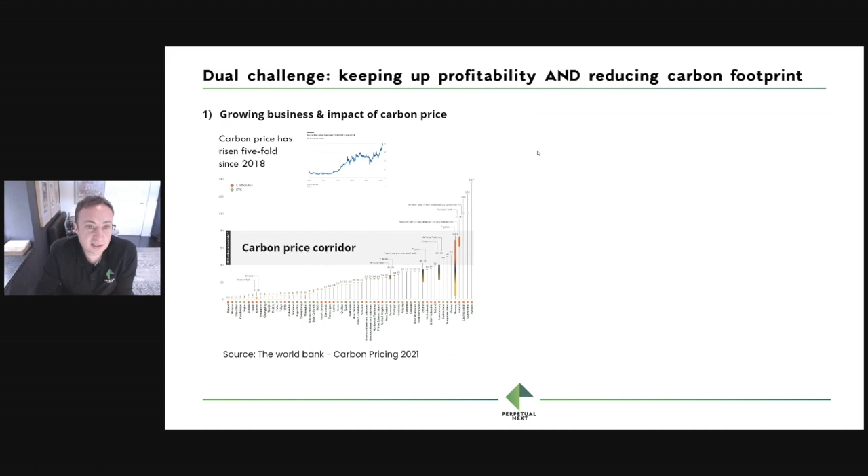So going back - we recognize a dual challenge. Keeping up profitability and reducing carbon footprint is a challenge for many of our customers. They want to grow their business, and the impact of carbon price is an issue for that.

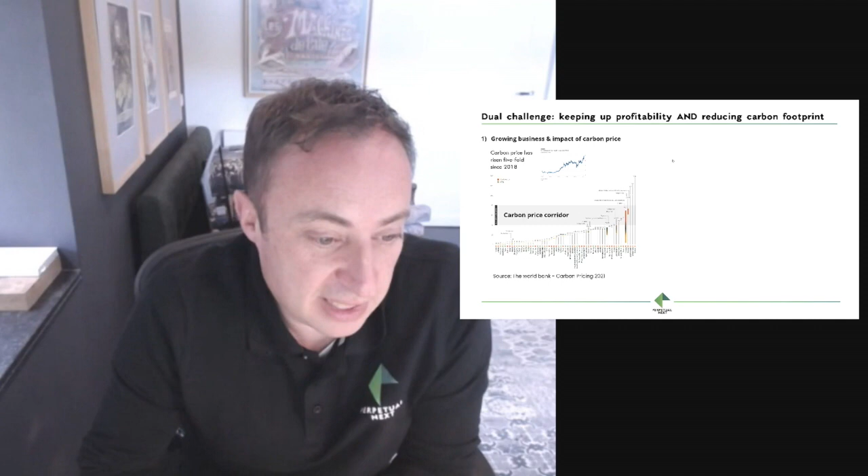The World Bank has recently shared a report on carbon pricing, specifically the carbon price corridor, which shows the different current prices of carbon and clearly indicates these prices will only increase, which puts pressure on business growth. On the other hand, companies do want to reduce their carbon footprint, and this isn't only about regulations and the Paris Agreement - it's also about identity and staying ahead of competition.

So in this transition phase, we understand at Perpetual Next this is not an easy task, and we know these are no small assignments.

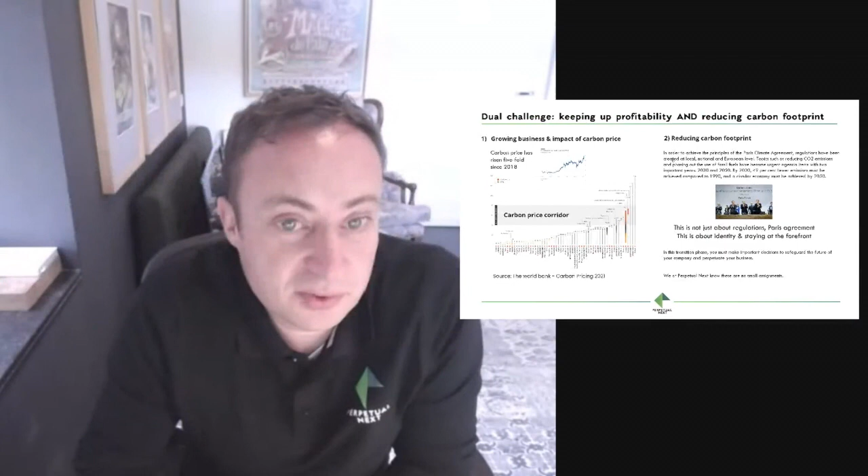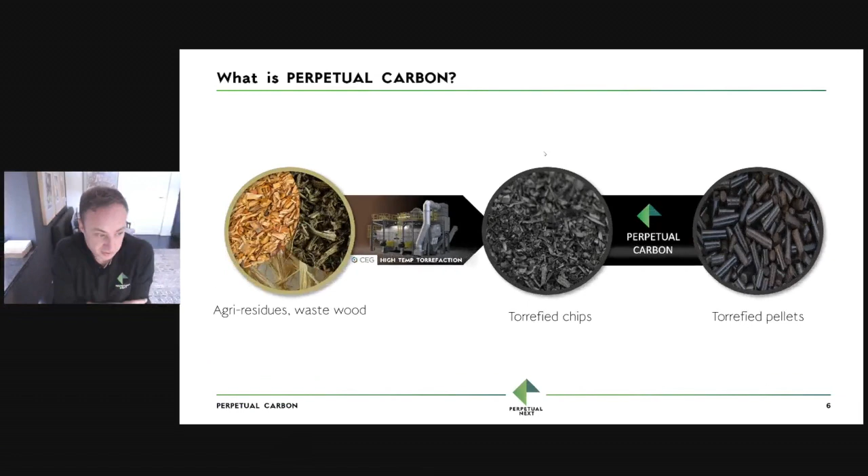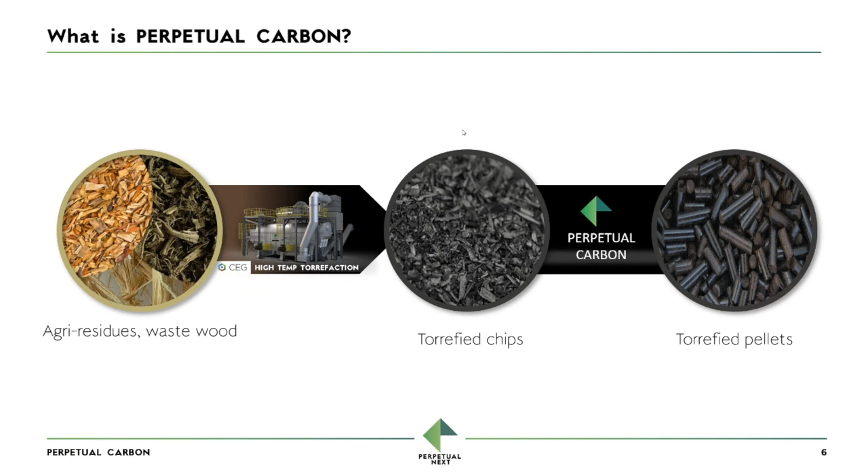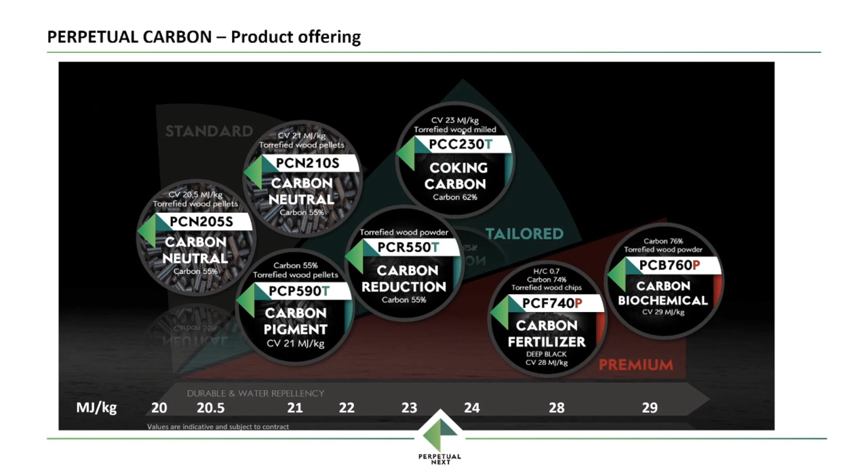Back to what we are offering - the material we offer is what we call perpetual carbon. It's a renewable carbon, and we torrefy agri residues and waste wood into torrefied chips, and we can further densify into torrefied pellets. Our reactor can leverage different products, different grades, with different types of carbon percentage, as well as energy content and CV value, which you can see in this picture.

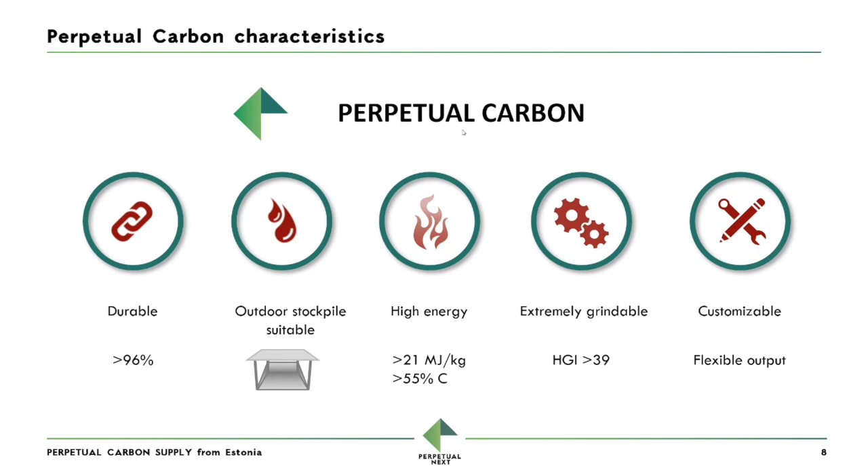There are some critical characteristics and advantages of renewable carbon: durability, outdoor stockpile suitability - we do recommend a tarp cover or another cover, but the material can be stored outside - high energy content, grindability, and the customizability of the material.

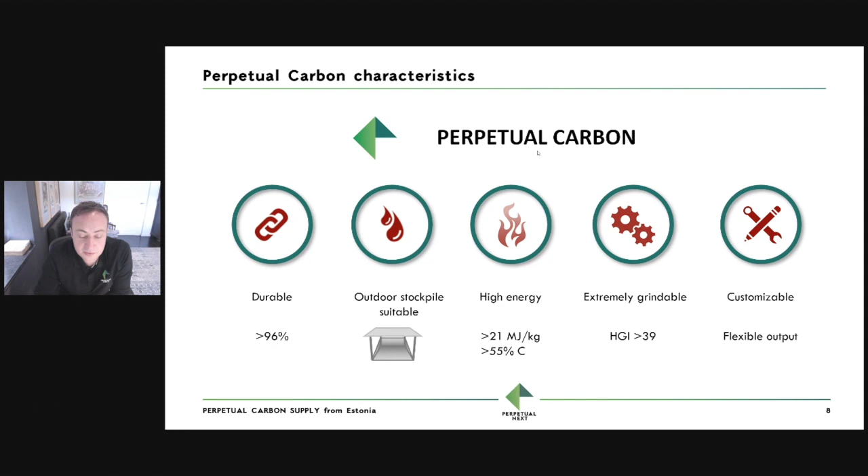What you've seen in the video is specifically the torrefaction technology, which is the high temperature torrefaction technology. You can see the image, the rendering of the equipment. We are a technology provider, and we want to provide this technology for different clients to produce and convert different types of feedstocks with our equipment at your location.

The HTT4 feeds back the heat from the torrefaction process to the dryer, making this a self-supporting process. The excessive heat is used to dry the material, and it's torrefied and cooled before it's conveyed for further processing, as an example when pelletization is required.

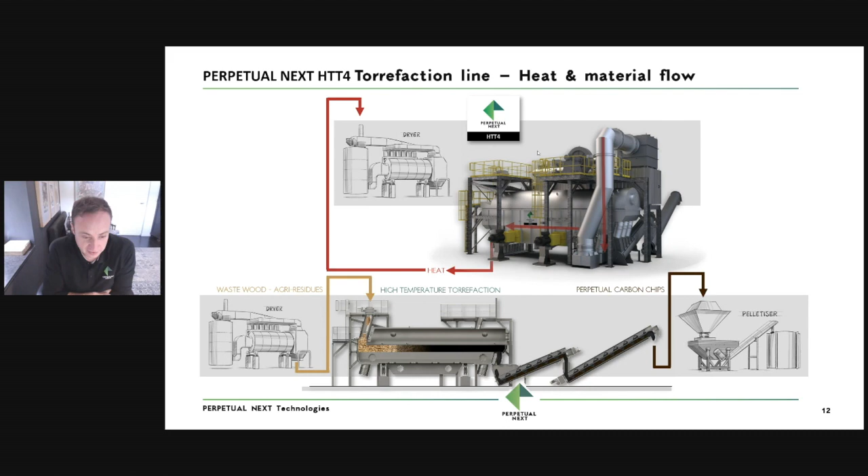At the bottom picture here, you can see the flow of the material. The wood or agri residues are fed into the reactor. The reactor is based on conveying vibrating - it's a vibrating reactor, so the material is conveyed throughout the reactor from left to right, kind of bouncing, which you've also seen in the video. The material is torrefied at the end of the reactor.

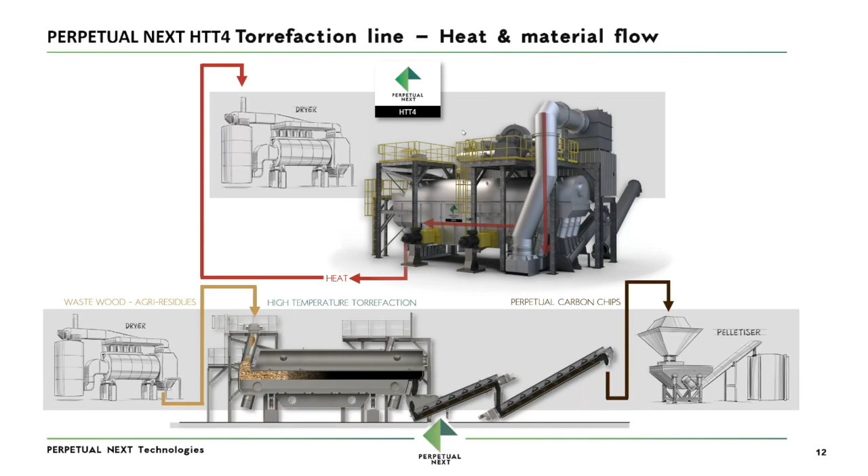This picture complements my presentation. So here's a bit more information on the specific elements of our high temperature torrefaction equipment.